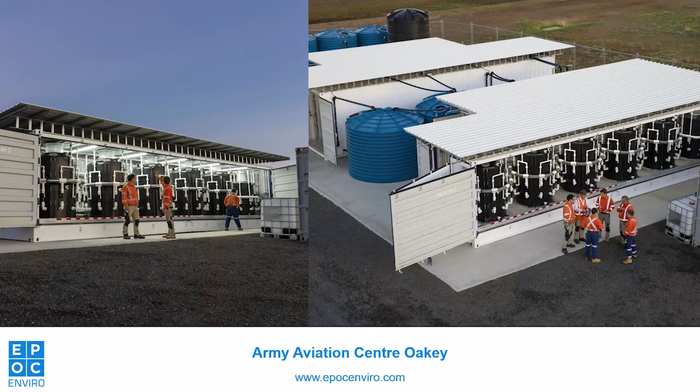Probably the highlight for us is the Oakey plant, the original SAFF plant up in Queensland. That was a 3-year trial project that concluded earlier this year, and we're happy to say we've had our contract extended, so we're no longer on a pilot trial - we're actually a fully fledged, grown-up water treatment plant operating on site. We've had the volume of water we're treating through that plant quadrupled. It hasn't had any exceedances in those 3 years. It's processed about 25 to 30 million gallons over that time, and we've reduced that down to about 12, maybe 14 gallons of concentrate now. So it's been performing exceptionally well, and a testament to that is the contract extension, which we're really happy with.

Similarly at the Telge site in Sweden, where we put our first containerised SAFF system on a landfill - I remember arriving there in the depths of winter last January, terrified this project was going to be the death knell for us. Here we are, and that plant's also treated about 25 million gallons of really complicated landfill leachate water. I know Helena from Envytech has just had that contract extended for another 2 years, so it's at the very least going to treat another couple hundred million litres. Great, very exciting advances.

And then we've set up our manufacturing plant, with lots going on around the world. I guess the other thing is we've got more units out in the field now, and a list of units currently under manufacture that will be in the field shortly. Do you want to give us an overview of that position?

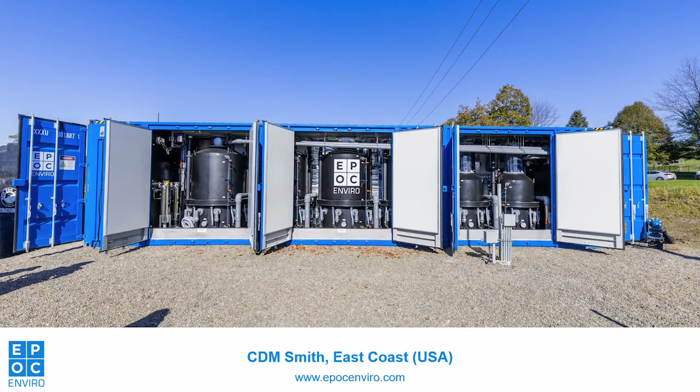In the US, you'll hear from Mark Salvetti a bit later, but CDM Smith, who we've been working with for a few years, did a fantastic full-scale field trial in the eastern states recently on a site. We've got a trial coming up in Massachusetts on landfill leachate. The big news is we've got a contract with the Minnesota government to provide a SAFF system up to Minnesota. These guys are trustees of some of the big settlements up there with PFAS contamination, so just out of Minneapolis we've got a plant going on an extended field trial to treat surface waters and other PFAS impacted waters.

And back home in Australia, we've got another plant going to the guys at Shoalhaven City Council in New South Wales, where they've got a very interesting circular economy approach - taking their landfill leachate water, putting it through the SAFF, recirculating that through a glass recycling plant, and then that water comes back. So the SAFF sits at the centre of this quite complex waste management process. Exciting to see that a bit closer to home as well - projects happening everywhere.

There's lots going on, and certainly the Minnesota one is very exciting, because I think it's the first sort of technology being used at that site. I thought it might be beneficial at this point in the webinar, for viewers who aren't familiar with the surface active foam fractionation technology we've developed - and we've been talking about now for 5 webinars and a couple of years - to show a very short animated presentation giving an overview of how that technology works.

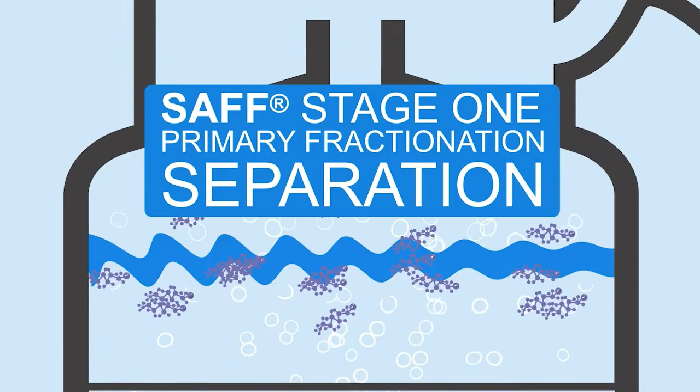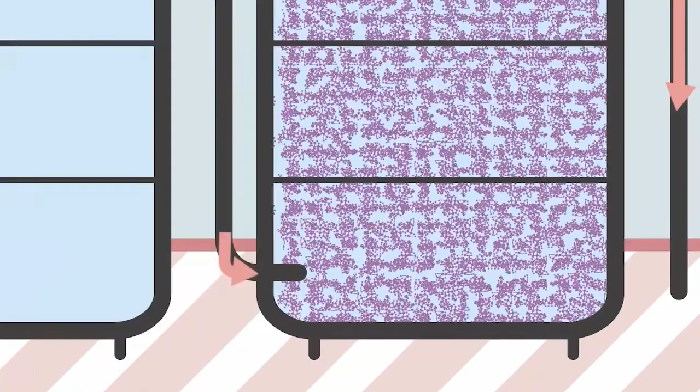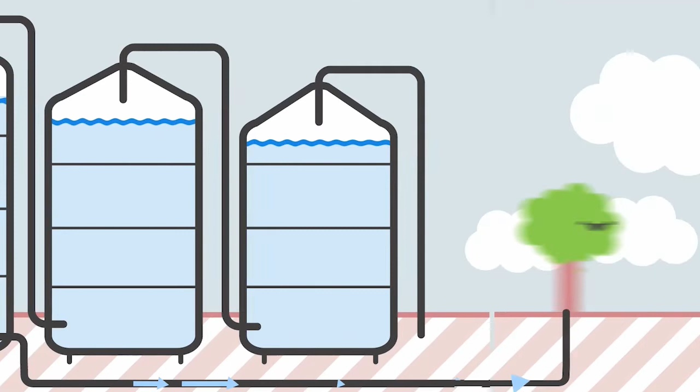Surface active foam fractionation, or SAFF, is a proven method to remove PFAS from water. SAFF works in 3 distinct stages. During the primary fractionation stage, PFAS molecules are separated from water using the power of air. At the secondary fractionation stage, the PFAS molecules are concentrated. At stage 3 of their fractionation journey, the PFAS molecules are hyperconcentrated. Once hyperconcentrated, they are ready for destruction, and in the meantime, the clean water can be safely returned to the environment. Air bubbles concentrate PFAS - their use in SAFF presents a highly effective and environmentally responsible way to strip PFAS from water.

Excellent. So very, very simplistic overview there, but now we're going to get into the real nuts and bolts of what we're here for today and get into some of the chemistry and more stats and figures. But what we're here to talk about today is the short chain removal from PFAS, and maybe we start at the beginning of this webinar by just exploring what short chains are and why they've been problematic for remediators like ourselves and our competitors to remove from PFAS.

Sure, mate. I can kind of kick that off. We'll dive into the chemistry of the short chains a little bit later, but in a broad sense, I'm never quite sure what the final number is, but somewhere I think between 6,000 and 10,000 different PFAS compounds out there, and short chains make up a reasonable amount of those. And so for us, short chains are typically the C4 and C5 chemistries, the C6 carboxylates, the ones where the Langmuir constant is a little bit lower, which kind of means they're a little bit more soluble. They're a little bit more slippery in a remediation sense.

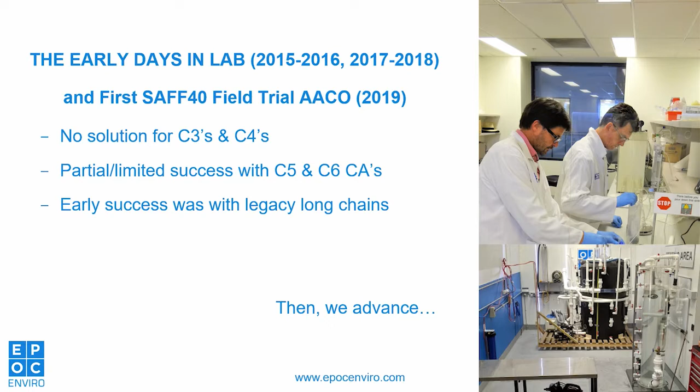I guess from the early days in the lab, 2015, 2016, all the way through to 2018, and including the first SAFF 40 field trial work up at Oakey in 2019, the short chain treatment has always been front of mind for us, even though the regulation and criteria at that time was focused on PFOS, PFOA and PFHXS, these being the main chemicals listed or nominated for listing on the Stockholm Convention's Persistent Organic Pollutants Register. But up till this time, we only had solutions for the long chains.

Then we advanced to our first field trial in Sweden, SAFF 40, January 2021, where we were asked to manage and remove PFAS to below 50 nanograms per litre, and also monitor the other Swedish 10 compounds from this very large landfill leachate catchment that was characterised by complex chemistry, excessive foaming, to the point that if you didn't manage it, it would flood the columns. It was crazy. With foam.

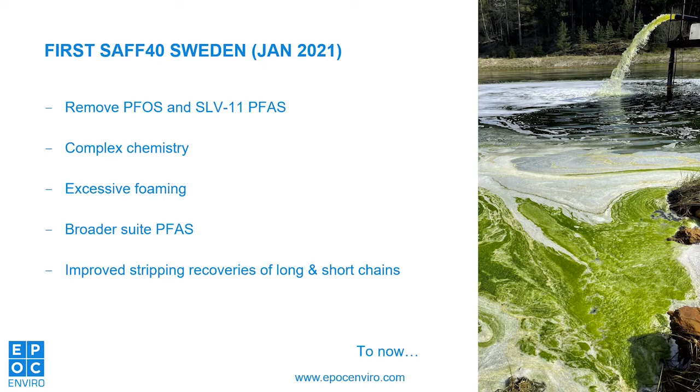And there was a much broader suite of PFAS at this site compared to the 3M Light Water contaminated site here in Australia. And this site was the first time we actually noticed much better stripping of long and short chains, most likely due to all the other non-PFAS amphiphilic substances present in the leachate feed.

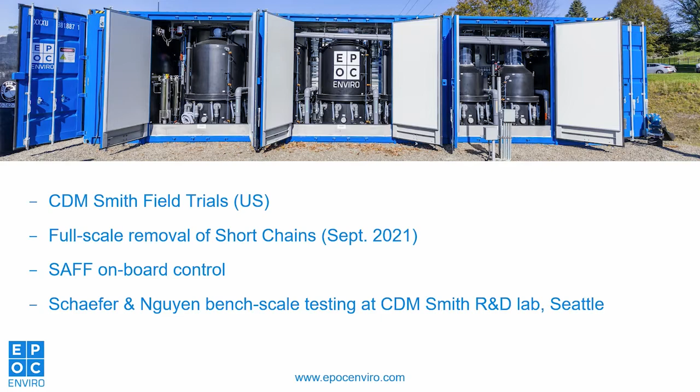And then to now, with our first SAFF 40 field trial in the US, partnering with CDM Smith, who's leasing and managing this project. This is the first time where we're seeing this new and exciting news on short chain removal using a full-scale SAFF platform that removes these short chains just using the onboard control system of the SAFF. And a lot of upfront preliminary work was done by Drs. Charles Schaefer and Dung Nguyen from the CDM Smith Research Lab in Seattle, who did bench scale feasibility studies. Yeah, those guys were great help.

Because Pete, you've talked us through some of the mechanics and changing things and working with different sized air bubbles and so forth. And yesterday we were talking about trying to look at the air bubbles as being that adsorption media, and I think that's important that people understand. Yeah, it is, mate. In trying to explain foam fractionation technology, which for some viewers might be a fairly new concept, others are starting to get used to it.

I remember turning up in the States at an ESTCP conference in 2019 and nobody had heard of it. Physical separation, it seemed like I was a crazy guy. And I came home and I was like, oh, no one knows about it. But anyway, I think we have managed to get the word out, and that air-water interface is becoming increasingly understood as a really great medium.

But what I'd ask viewers to think about is when you're used to granular activated carbons or ion exchange resins, these are adsorptive mediums. They have a certain number of available sites. Those sites allow PFAS materials to bind to them in an adsorptive sense. And they have a certain capacity which once filled requires either replacement or regeneration. And if you think of the air bubble, it's actually no different. It's really an adsorptive medium for PFAS, just like GAC and resin are,

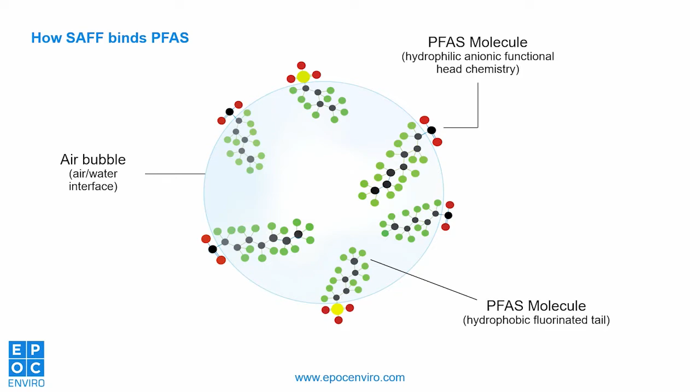Well, I like that slide that was on before, it demonstrates how the molecule likes to hang out in air bubbles. Yeah, look, you've got this hydrophobic tail, which is a characteristic of most PFAS compounds, and then a hydrophilic head group. And so that surface of the air bubble is a very comfortable, to use another simplistic term, environment for PFAS compounds to reside on. It's where that Gibbs free energy is managed to its best ability, and so PFAS will preferentially transition onto that interface.

Yeah, I love it. And then we just lift it to the surface. Free ride to the top. Free ride to the top, gather it in a bit of foam and then extract it. So very simplistic technology, but works very effectively.

Just on that, you talked about introducing different sized air bubbles, introducing additives at different stages during the process and so forth. Does that mean that the SAFF units we've got out in the field, we have to recall those to retrofit them? No, mate. We've been building fluid transfer systems and management systems for 30 years, for fuels, for contaminated waters, for hydrant waters, all sorts of stuff.

And so when we're doing these complex engineering solutions for fluid movement, we've always got an eye to redundancy. We don't want to sell the client a product that's redundant in 12 months' time, and we've taken a very similar approach with SAFF. And so really right back to the very first SAFF 001 that we saw up there at Telga, we've been building them for, but not with, a lot of the adaptions that we've since made.

So we had extra apertures and penetrations in the vessels for integrating different types of sensors. We ran comms lines through that we didn't know what we were going to use them for, but we had them there. We overspec'd the onboard PLCs and NUCs, the small computers that are on board, so that they could accept additional data streams. And so we've really gone right back to SAFF 001.

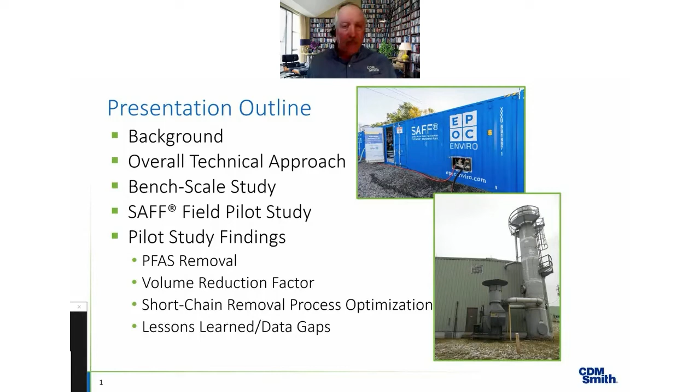There we go. So we have chlorinated solvent contamination in groundwater, but our client actually had an accidental release of AFFF from a site drain line. This impacted site groundwater about 300 feet from the nearest extraction well. But over time, the operation of the extraction well has drawn that PFAS towards the extraction well, and we're starting to see PFAS in the air stripper effluent, about 500 parts per trillion. Our client was required by the regulators to do something about it.

They needed to move quickly, and they were required to add treatment to that air stripper effluent to prevent the discharge of the PFAS. The air stripper effluent goes to the local river under a discharge permit. So we scrambled and we installed a temporary ion exchange treatment system to remove the PFAS. We've got two 200 cubic foot resin vessels in series. It actually works really well from the standpoint of removing our PFAS compounds.

However, our site groundwater coming out of the stripper has very low concentrations of dissolved manganese. And they seem low. The vendor thought they were low, but they've been causing us problems in the resin. We get a crust forming on the top, so we get this cementitious layer of resin and manganese forming on the top. Also, fine particulates that precipitate out inside the resin bed. This has caused a lot of operational problems. We need to shut down and remove that cement layer off the top.

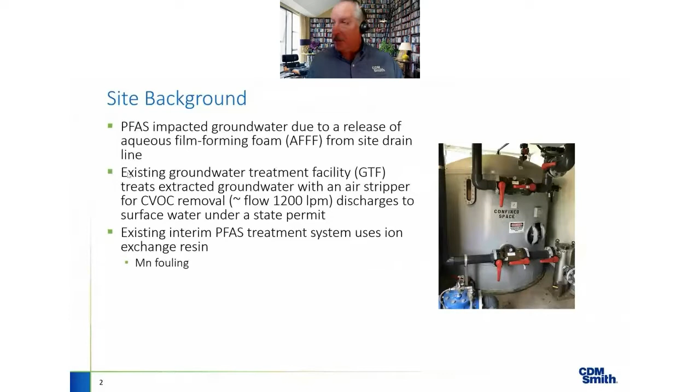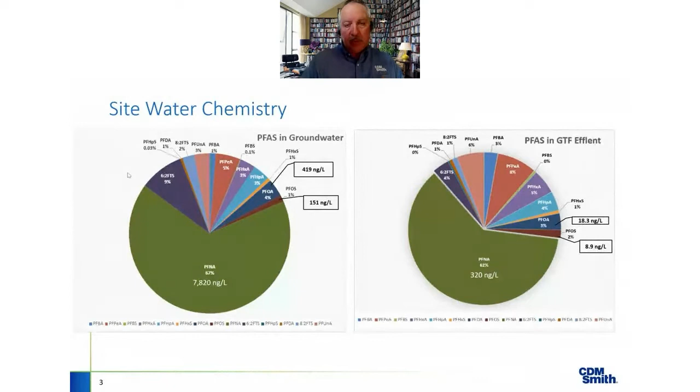So initially we collected site groundwater and air stripper effluent, shipped it to our pilot study bench scale system in Bellevue, Washington. We ran it there to try and establish operating parameters, evaluate how well it foamed, see how well we could remove PFAS concentrations. And then we took that information and we translated it into the field pilot, where we ran both water types. We wanted to see what the operational settings were for each water type, evaluate how and if we could remove the short chain compounds, confirm our concentration reduction, and look at energy consumption, but our overall cost, because the client was interested in replacing the ion exchange system potentially with SAFF units in a full scale scenario.

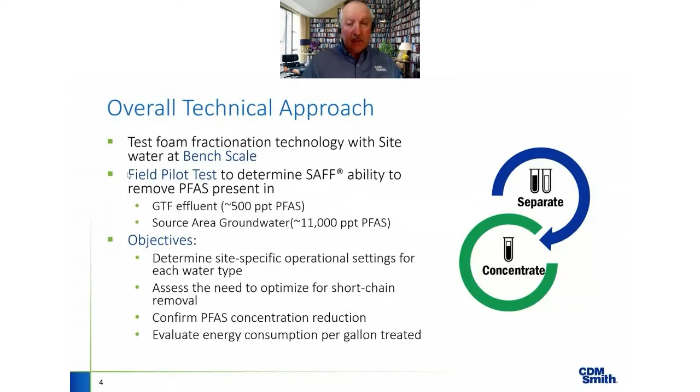Eventually, we ended up having to add amendments to enhance that foaming. Once we did that, the system worked great. We saw multi-log PFAS reduction at the bench scale. We were able to establish a good PFAS mass balance. We were able to show the amendment we added could be removed. That was important. It was readily removed and concentrated with our PFAS. And we saw an 80 to 200 times concentration factor across two stages, a primary and a secondary fractionation.

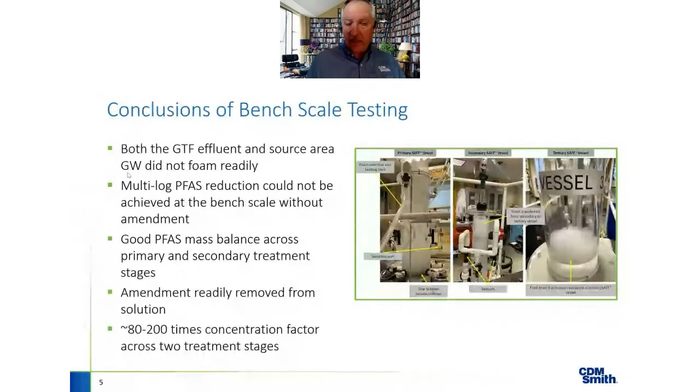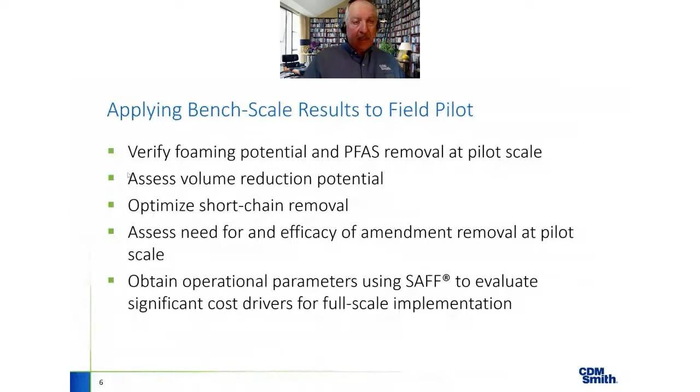So once we evaluated those bench results, we took what we learned and we translated it to the field pilot. We were curious whether we'd have the same issues with foaming or lack of when we ran our site groundwater through the SAFF 40, look at what kind of volume reduction we were getting through the system, what needed to be done to remove short chain, again, verify the amendment was needed, and then if needed, that we could remove it, and understand what the operational parameters could be if we chose to go full scale, what that was going to cost, how many units we would need, and so forth.

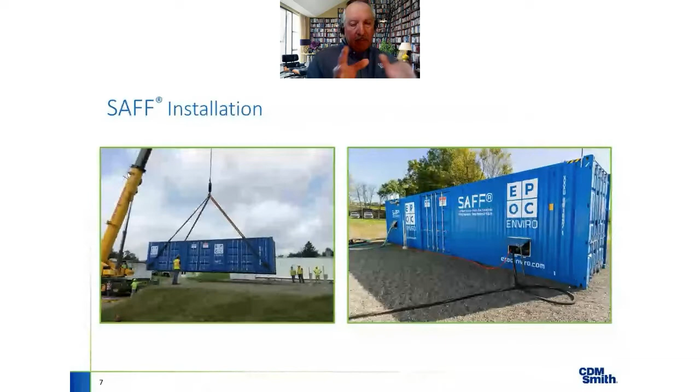A couple photos of the installation. The unit was shipped from Australia to Philadelphia, and then it was trucked to the site. We've got a crane here lowering it into place on our treatment pad. There in the background, you see the white shipping container. That's the container that actually holds our temporary ion exchange system. Both ion exchange vessels are inside that container. We had all our needed infrastructure here: power, discharge, piping. We could draw water from the air stripper effluent, which goes to the ion exchange system in the background. So we were able to just load it here on our gravel pad and go.

So initially, we started out with the air stripper effluent. Our regulators required us to demonstrate that we could remove PFAS to our discharge limits before we could run the unit and just discharge to the river. So we had to run in batch mode. We ran batches of primary fractionation and took that treated water and stored it in storage tanks on site until our lab data could come back and we could show to the regulators, look, we've achieved our discharge standards. Now for us, we were being regulated only on PFOA and PFOS, about 5 and 6 parts per trillion, respectively, in our discharge before we could go to the river.

We looked at different variations on aeration energy, basically aeration rate, duration, and we also evaluated optimization for short chain removal. We adjusted these parameters. We looked at adding amendments at different times during the process. And ironically, the very first run that we had actually was able to achieve our discharge standards. But we collected all of our batch data and we selected the best parameters, ran them by the regulators, and they approved us, and it allowed us to start running continuously on that air stripper effluent. We ran that way for 8 hours a day, then shut down, then restarted the next morning.

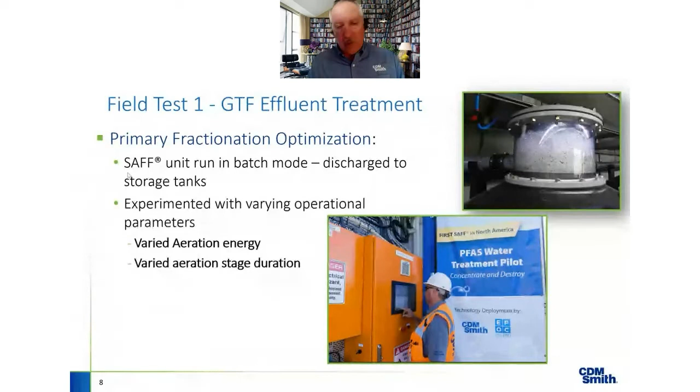Now, as you saw in the animation, there's multiple steps in the SAFF process. So our primary fractionators were able to achieve our discharge standards. So the water came in, it was fractionated in those primary units, the treated water was just discharged. The foam that came overhead was collected, and once we had enough volume, we ran our secondary fractionation. We ran a secondary fractionation about every 3 hours of continuous runtime. About 6% of each of the primary fractionation vessels ended up going overhead as foam and ultimately was treated in

the secondary fractionators. The photograph here on the right shows what you would expect to see in the hood, in the top of the secondary fractionator. You see a good head of foam. It's actually being drawn out through the top and accumulated in another tank for later tertiary fractionation.

Interestingly, we had trouble getting these secondary fractionation runs to work, running on the airstripper effluent. It sort of behaved more like we saw on the bench. Initially, airstripper effluent in the primaries on the SAFF unit actually performed better than we saw on the bench. The secondary fractionation was reminiscent of what we saw on the bench. We actually had to add small amounts of amendment to enhance the foaming and get this tall head of foam to form so that we could draw out the PFAS from the secondary fractionation. But ultimately that worked very well. We were also able to optimize to remove short chain compounds.

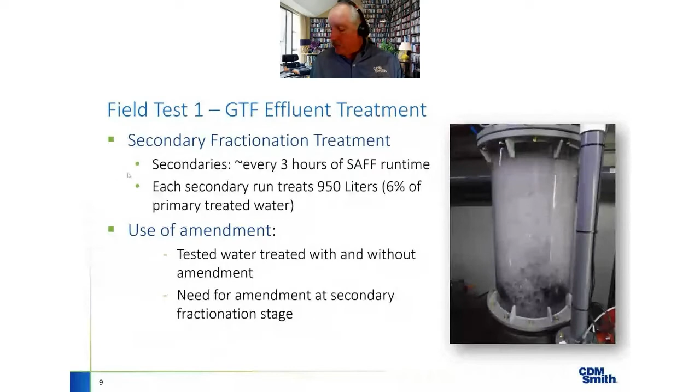So my next slide is going to have a table that'll show our analytical results. So let's start in the middle here. The green columns represent SAFF 40 runs on our airstripper effluent with about 500 parts per trillion total PFAS and no significant optimization to try and enhance short chain removal. We were focused just on PFOA and PFOS removal. We had no amendments, and we actually were able to consistently achieve our discharge standards for PFOA and PFOS. We saw between 82 and 98% removal, consistently achieving our discharge limits.

PFNA was our main compound, 90 to 99% removal. Overall, about 73% removal of our total PFAS. So our 520 parts per trillion, on average, we were discharging about 140. We needed that amendment to successfully perform the secondary fractionations, but it was fully removed. It concentrated with our PFAS. There was none in our effluent.

So then we began working, as I mentioned, on short chain enhancement, adjusting aeration, durations, adding amendments. It's critical that you add it at the right time. Adjustments to the way we collected and consolidated our foam. And that was super successful. Over 96% removal of our regulated compounds, 99.5% removal of PFNA, 97% overall removal, and you can see a significant improvement in our short chain removal.

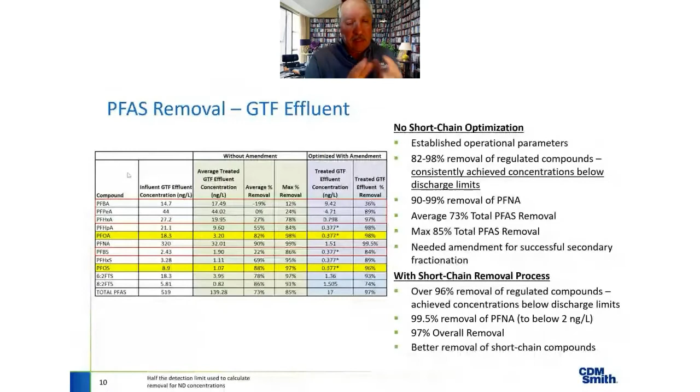Once we ran through our airstripper effluent, we started collecting source area groundwater. And this was a slower process because we only had a single monitoring well that we could draw water from. So we had to run only in batches. We didn't have a continuous 300 GPM flow of water that we could take a slipstream from to run the SAFF unit on. But we still ran the same way. We filled our primary fractionators. We looked at different aeration energies, durations, how we consolidated the foam. We ran with and without amendments to see what our performance was on not just short chain, but all PFAS removal, and then what we could do to enhance it.

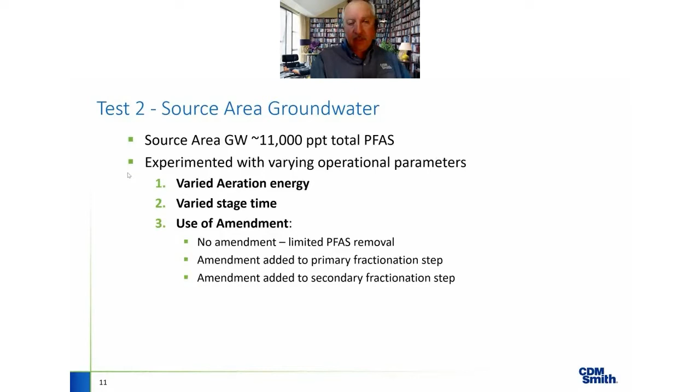So again, we went back and we ran additional runs with different aeration rates, durations, foam collection, and amendments. And here again, we saw a dramatic improvement when we optimized for the short chain removal. Over 98% removal of our regulated compounds. So we got PFOA from 400 parts per trillion down to 1.4.

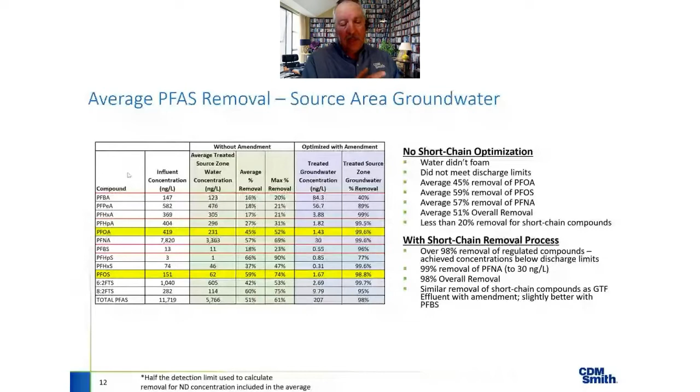We saw 99% removal of PFNA, going from 7,800 parts per trillion down to 30 — 98% overall removal on this high concentration groundwater. We also saw a big jump in short chain efficiency: PFBA went from 20% up to 40%, and PFPEA jumped up similarly. This was a really successful demonstration. It showed that we could treat our site groundwater, this high concentration water, as well as our airstripper effluent, meet our discharge standards, and even go beyond that to enhance our ability to remove short chain compounds.

A few conclusions from this run: we showed that this unit can successfully treat our site groundwater, achieving up to 400 times reduction in some individual PFAS concentrations. We demonstrated this on both dilute water from the airstripper effluent at about 500 parts per trillion, as well as the concentrated groundwater. We were able to optimize the unit's performance and enhance short chain removal. We saw no impacts from dissolved inorganics, no fouling, no scaling — as expected. That was a great improvement over the ion exchange performance.

We do feel that this piloting step is still critical. We learned quite a bit from our bench scale testing, but we're not yet confident that we can make a direct leap from bench to a full-scale system and be confident we can achieve the discharge standards. It's case by case, but right now we're recommending the pilot step right after the bench step.

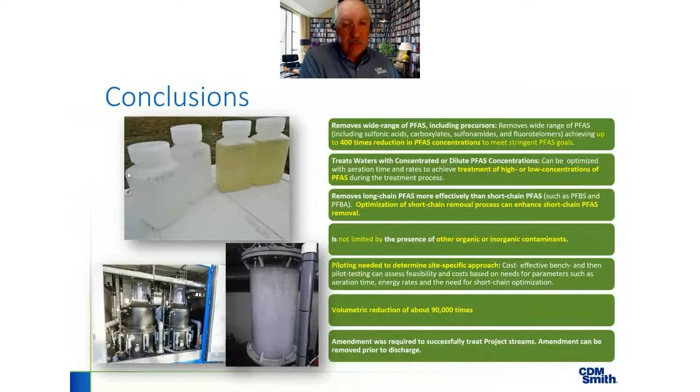We saw a volumetric reduction of about 90,000 times. We treated about 1 million liters of site water, 260,000 gallons, and from that we got about 2.8 gallons of tertiary fractionate. That water had about 5.5 parts per million of total PFAS in it. We did need the amendment, but that wasn't an impediment — it greatly enhanced our removal. It was all removed and concentrated with our PFAS, and we had non-detect in our effluent water to the river.

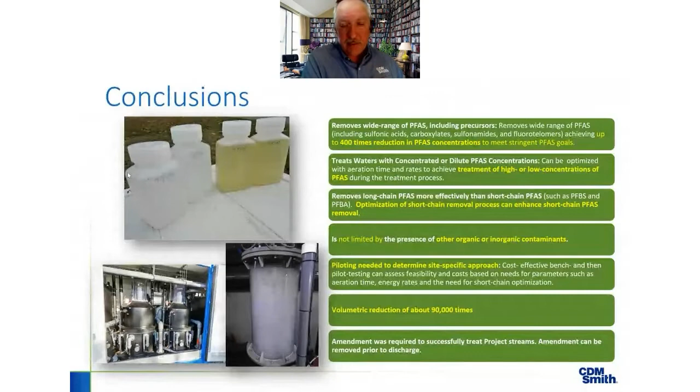We had to continuously demonstrate that for our regulators. Overall, we were very pleased with the performance, as was our client. We had some data gaps — there are some things we want to look at more closely the next time we run the unit.

We do feel we still need the pilot optimization step after bench. As we've discussed throughout this webinar, running the unit standard, without any attempt to enhance short chain removal, doesn't give great short chain removal efficiency. However, we can optimize that significantly and greatly increase the amount of short chain compounds removed.

The amendments can be a bit of a regulatory acceptance issue. We had to show our regulators what we were using, and that we could remove it before discharging to the environment. It wasn't that difficult — we were able to show that, and it was consistent both on the bench and here on the SAFF 40 full scale. We were able to show we could remove it.

We did have some mass balance issues. Treating 260,000 gallons wasn't a huge volume given the low concentrations of PFAS in this water — I think we had about 0.5 gram total of PFAS in our effluent water and tertiary fractionate. We fed more than that. We know we didn't discharge any, or discharged very, very little, so we're not exactly sure why we couldn't close the balance. I suspect we've got some PFAS clinging to various nooks and crannies inside the SAFF unit — there's just such a little amount of mass that it's difficult within the analytical accuracy to capture it all.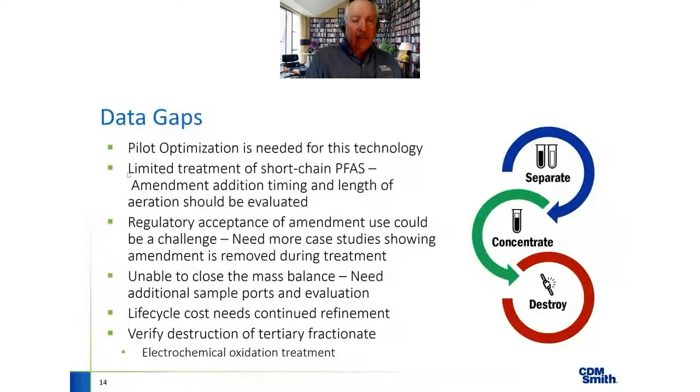We're still working on the life cycle costs. And this isn't really a data gap, but a natural question is: you got 2.8 gallons of tertiary fractionate, now what? We're busy treating it right now using electrochemical oxidation — we have a pilot size unit in our Denver lab, and the water from this system is undergoing that treatment right now. It's been very successful. I don't have permission from the client yet to share those results, but it's very promising, and we believe there's great potential that we will have no waste — that we can totally destroy the PFAS in that concentrate and have little, if any, waste stream to dispose of with PFAS.

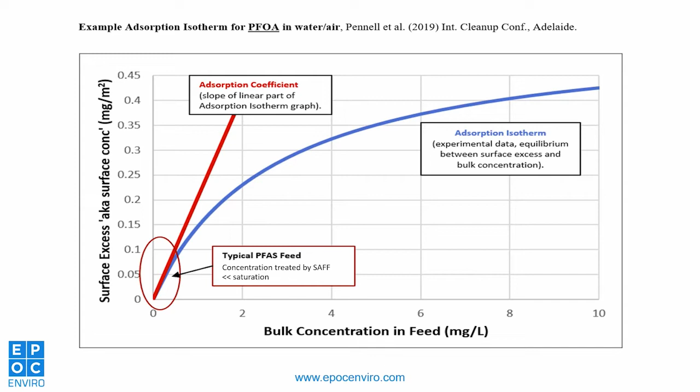So it's denoted by the red line, which derives as the gradient of the adsorption isotherm for any particular PFAS in a specific water under specific criteria. And it's this information that helps us decide if a specific PFAS molecule will be uptaken onto the all-important air-water interface. And that then determines whether or not we're able to strip out that molecule from the feed water to below the site adopted criteria.

And I guess the key point to note is that because short chains have much lower adsorption coefficients than long chains, it's a bit harder to do that. This occurs because short chains tend to be much more soluble in the feed water. They have a much shorter dipole moment across the length of the compound. And it all adds up to mean that the short chains have a much smaller Gibbs-free energy saving by jumping onto an air-water interface of a rising air bubble. So that's the chemistry part of it.

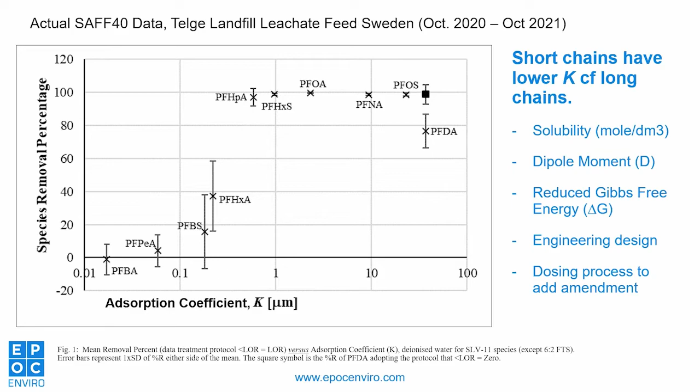Then we add our SAFF engineering knowledge to try to add additional encouragement to short chain compounds which are in that group of low adsorption coefficient compounds, to try to push them onto that all-important air-water interface in combination with the new amendment dosing system we have in the SAFF as standard, to add an amendment at the right time in the right location for the right amount of time, which is why we think in the future we'll get even better PFBA stripping that Mark's just gone through, but also a whole range of other chemistries.

And like we're even seeing now lots of questions and inquiries to EPOC Enviro. What else can you strip out of water besides PFAS? And what else do you think we can strip out?

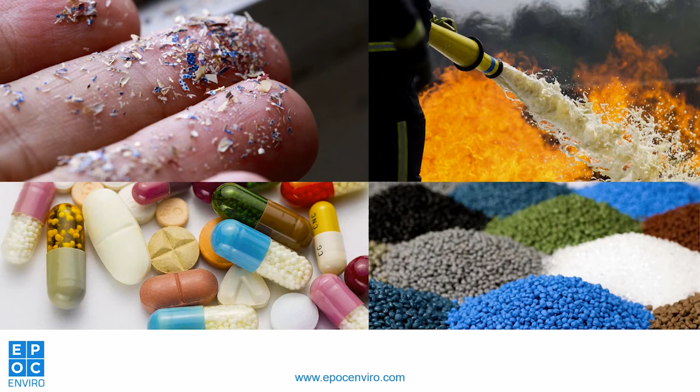There's heaps of things. So the first one that comes to mind to me is all the foaming agents that are non-PFAS that are in F3 PFAS-free foams. So they still can do environmental damage if they get into an aquatic waterway. And a lot of those, they're going to foam. So it's obvious to use foam fractionation for that.

There's microplastics in wastewater. So we've done some work with Scott Wilson's team at Macquarie Uni, where we loaned him and his team the EPOC Systems desktop SAFF apparatus, and they spiked in microplastics, and he was able to show that he could remove more than 95% of what he spiked.

There's pharmaceutical active ingredients that are surface active in wastewater. So I think as people like Brusseau and his team who have the intent to develop an adsorption coefficient register for lots of surface active compounds, when that eventually becomes available, let's cross our fingers, that'll mean that practitioners of foam fractionation will be able to predict what SAFF will be able to do for PFAS and surface active chemistries.

And I guess just to jump in there, Dave, in a very simplistic way, we're trying to play with the adsorption isotherm to optimise the removal of these various surface active compounds, including PFAS. So how do we play with that adsorption isotherm?

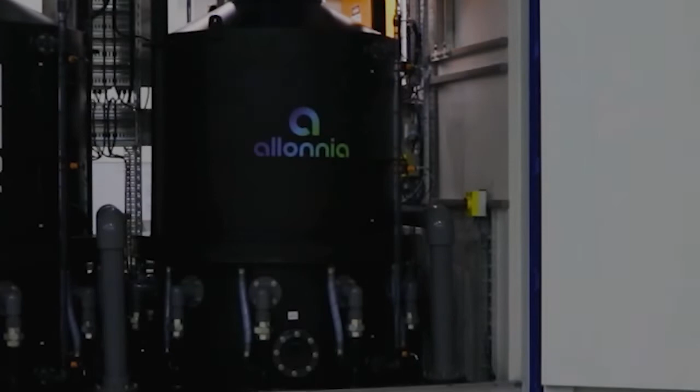Thanks, Connor. So here we are in Emu Plains at the EPOC Manufacturing facility that we've been setting up recently - only about 300 metres from where I went to high school, so the wheels have come full circle. We're here today delivering a unit for our partners Allonnia in the US, so this system will be heading off next week and it's getting wet tested today. Wanted to run you through a couple of things, mainly this fantastic facility which we've built.

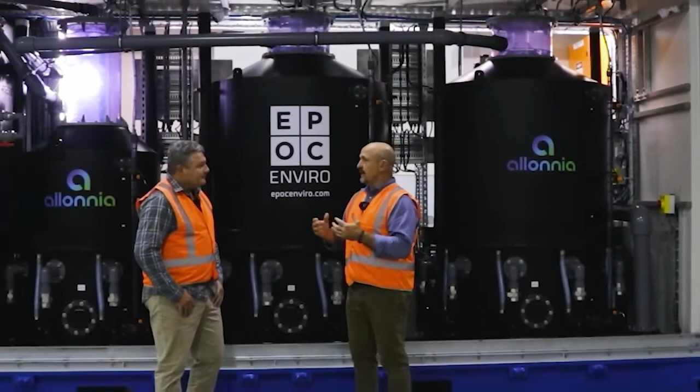We'd realised a year or so ago that we really had to ramp up our production capability, and so this facility is all about that story. We also wanted to take you through the actual quality control wet testing process we go through. So I'm joined today by Jeff Rowland, our Global Operations Manager, and effectively, Rolly, you're in charge, mate - once these systems are finished and the wet testing's completed, you make sure they make their way overseas? Yeah, that's it, Pete. The story doesn't end when it rolls out the door.

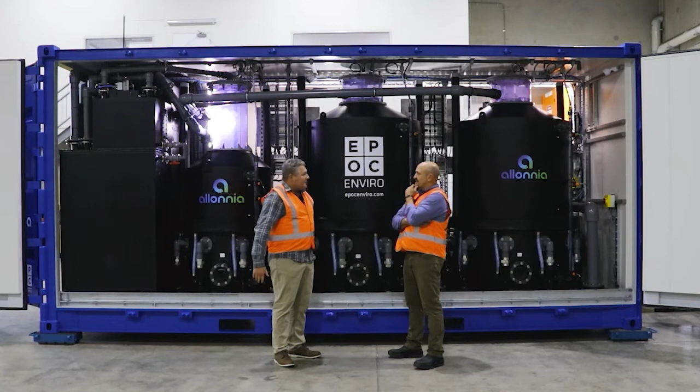It's great to be here and see the facility now starting to really take shape. Six months ago, we realised that we needed to get these units out to the market faster. Everyone was telling us that was a requirement, and so we acted on that. The project has gone fantastically well. Very proud of the team that put the facility together, and now we're seeing those improvements we were looking for coming to fruition. So it's exciting to then be able to have these units and start setting up the support that the clients are going to need across the globe.

So for 30 years or so, we've been a fluid movement, fluid handling organisation dealing with fuels and all kinds of different fluids.

And so the evolution to SAFF and the treatment of PFAS impacted wastewater is really not a big transition for us, but we have taken on a new basis of manufacturing in our agile system. So, mate, can you give us a rundown on sort of how that works and how it applies to the SAFF? Yeah, so obviously, Pete, the global supply chain disruptions that everyone's been experiencing since COVID joined our lives,

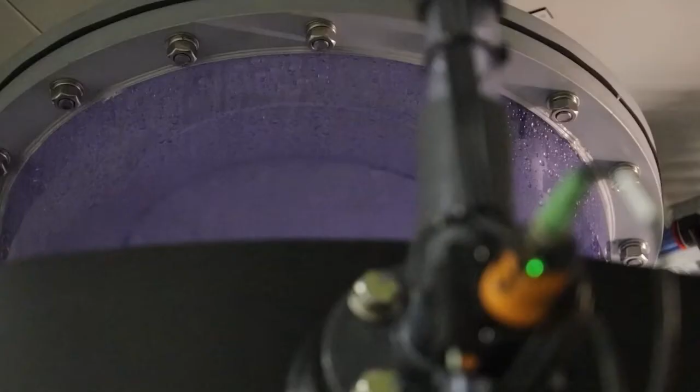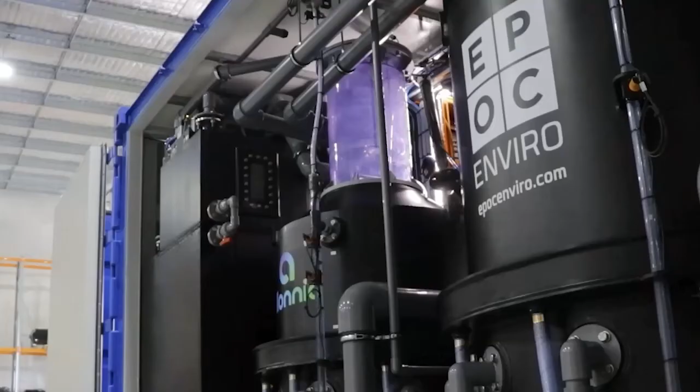means that you need to take a different approach to manufacturing. And Agile allows us to get all of our materials and equipment together to build very efficiently and with a high level of quality assurance, make sure that the units, when they deploy to our global SAFF supermarkets in all of our different regions that we support, have excellent quality standards before they leave this factory or any other factory, and then that the needs of the client and the value that we provide to the client through SAFF is maintained for the life of the actual unit.

So we talk about efficient production. What are we talking about through this facility here? Yeah, so the SAFF can be built piece by piece by piece, or it can be built as components and then brought together very, very quickly. So by restructuring the way that the plant works, it allows us to have multiple teams working on different parts of the SAFF all at the same time, which then are brought together to the finished product, commissioned, and then out the door. Yeah. And that's the whole aim of the agile manufacturing process.

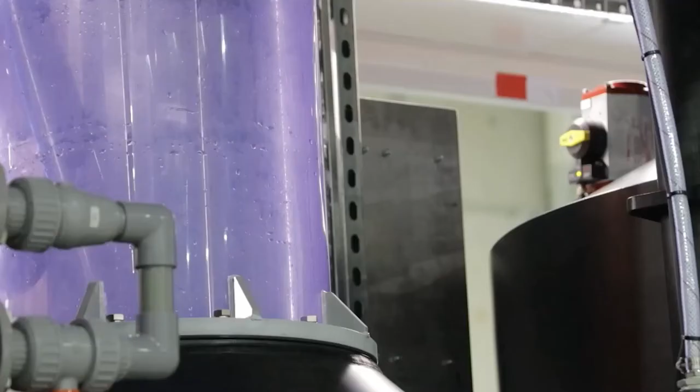Brilliant. So with a capacity of up to 150 units a year, we think that'll meet the demand over the next couple of years, and then we've got the ability to take this exact agile platform. That's the exact plan. Yeah, the regional support starts with operation and maintenance teams that can help a client commission a unit, do repairs and maintenance should that be required, keep the unit completely operational, and that is supported by a remote telemetry service which allows us to make minor tweaks and modifications to suit the environmental conditions that the SAFF units find themselves in, and also the types of contamination that we're finding in the water,

because it's such a wide spread. Sure, so we might find it in groundwater, we might find it in leachate water, and the SAFF system is able to work in all those different operating environments. It's a brilliant part of the unit. I mean, the purpose of today with the wet testing, though, is we're going to ramp the system up. We need to know the system's going to work. We'll go overseas and we accompany our units on each and every occasion to make sure they're functioning. But back here we do this wet testing process, which is all about making sure, at the most basic level, there's no leaks, but plenty of other systems.

We're testing the onboard computers, the PLCs and HMIs. We're testing all of our sensors, making sure that there's obviously no leaks. A couple of new changes that I'm super happy with. So great bunding integrated now. We've got an improved level sensor capability. We've got the ability to flush the hoods and the sensor lines automatically at the end of each process. So bit by bit we're learning, right?

Yeah, that's it. The whole process within EPOC's mantra is continual improvement. So as we find things that will make SAFF more efficient, that a client specifically needs because of their particular problems, then we make the effort to get those integrations right and continually improve the product and create value for our clients. Yeah. So as we wet test, on this occasion, we start the units up. So we've got our two primaries and our secondary. And the idea is we will just fill these systems up initially with potable water, and then we just trial with basic surfactants just to make sure everything's functioning.

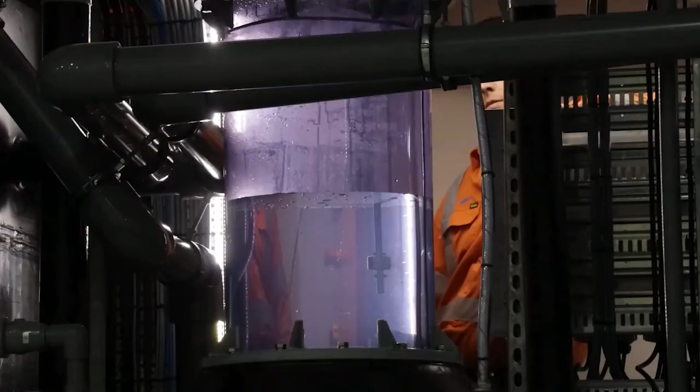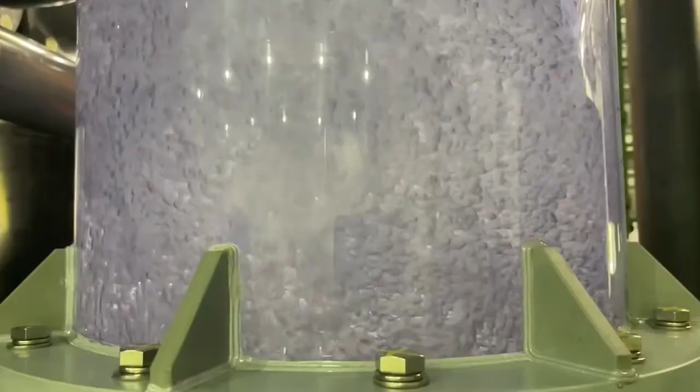So you can see the secondaries kicking off here, just checking right to the top of the level sensors that we're able to run that system. We aerate it, we pressurise it, and just make sure everything's running well. So looks great with the backlight there, but as the PFAS foam rises, it's drawn out of the top of these hoods and into the concentration tanks on the left. So some new designs in those tank banks as well, which is making it more efficient in the high foaming leachate environments. And as I mentioned earlier, various little tweaks that are helping us along the way.

Yeah, that's it, Pete. And the idea is to make sure that the units are supportable, that spare parts are readily available, that there's a team of qualified, capable technicians that can get in there and do preventative maintenance and reactive should something catastrophic go wrong.

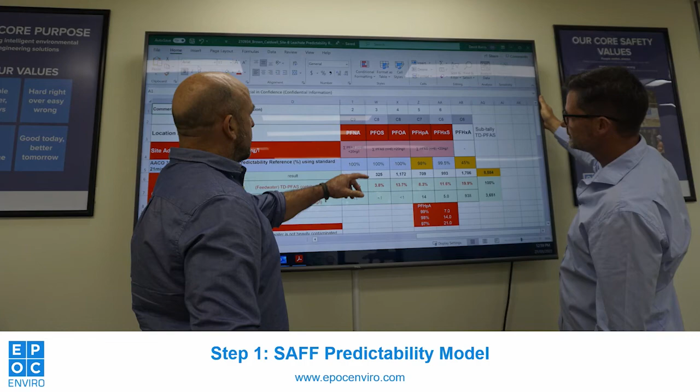Yeah, look, mate, it's pretty simple. It's really founded on the idea that if people are going to invest in your technology, they want to be confident it's going to work. And so we have this 3-stage process, which starts with our predictability model. On our new EPOC Enviro website, there's a form that you can fill in your details and input the PFAS concentrations at your site. It can be completely anonymous, and it generates a report that will tell you how we think SAFF is going to work.

So we've tested about 40 different types of waters now, from RO regenerates to process waters to landfill leachates and groundwaters and surface waters and so on. And so we have an increasingly high degree of confidence about how SAFF is going to work in those different kinds of environments, and we can give you that indication as part of that service on the website. Step 2 is we've got bench scale testing systems.

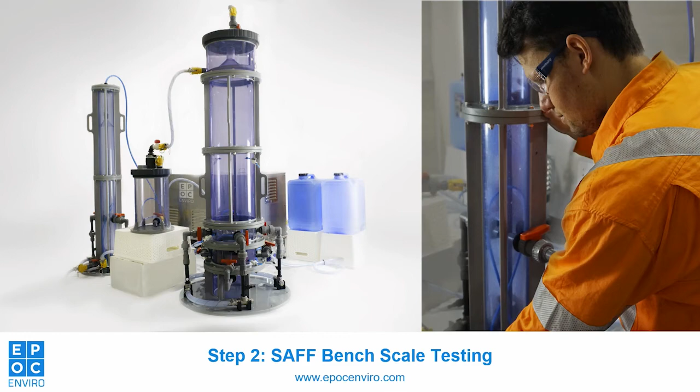So that's broken into kind of two phases. SAFF has separation and concentration phases. So if you just want to see how SAFF works to remove PFAS from your water, we can just do it with a simple 5-gallon sample or so, 4 to 5 gallons. We can run a test, generate a report, test before and after, and you'll see just how much of the PFAS and what type of PFAS is removed.

Or we can do a more complicated test, which takes us about 7 days to do, where we run a series of primary batches and we generate a foamate, and then we fractionate that foamate to see what sort of concentration factors you can effect. And that's pretty important because you want to understand how much waste you're going to generate. So we have that benchtop testing capability.

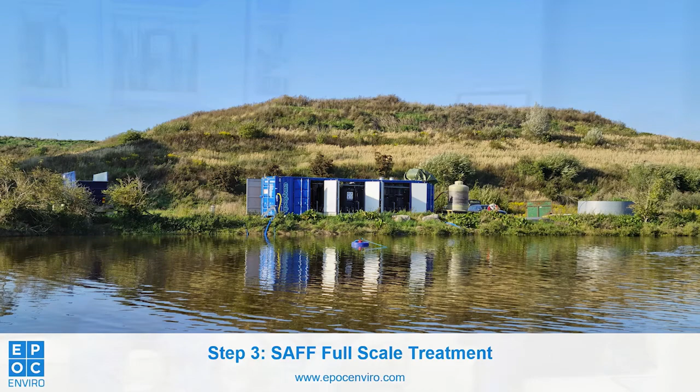And then, as Mark advocates for, and I really encourage this, we've got units in all the territories that can be engaged on trials on sites. Realistically, these systems do 40 cubic metres an hour, or maybe a bit less on leachate sites, but it's high volume throughput, 10,000 gallons an hour. So within a few days or a week or certainly a month, you're going to be able to run as many tests, crossways and every which way, to give you the confidence that it's going to work.

And then, if the results from that field trial come back as positive as they have in the scenario with Mark, then you can move to the proposition of either leasing these units or purchasing them outright for the site and utilising our operation and maintenance and site support and backup capability. What I really like with that 3-step process is it de-risks it for the client, and it also de-risks it for us in that we're not putting a unit on site and finding it doesn't actually deliver what we promised it would, which is great.